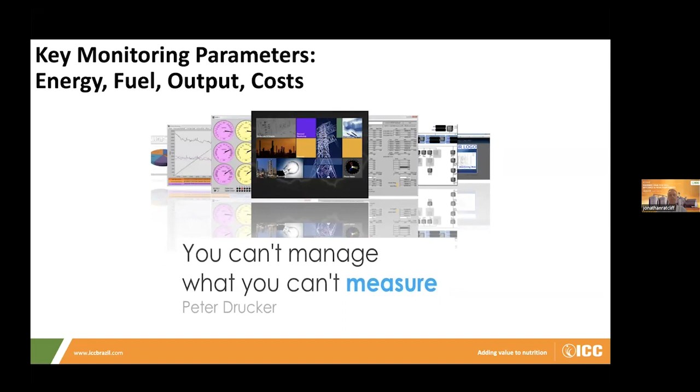Now, capturing data in this day and age is not difficult. That is the good part of this solution in terms of both cost and availability. There are many software programs that just require connections of power meters or other smart meters, a simple converter, and you can start to capture data. And with the right type of software as well, you can then manage how that data is presented to visualize the key parameters that you're concerned about. We're going to show you some examples of that later.

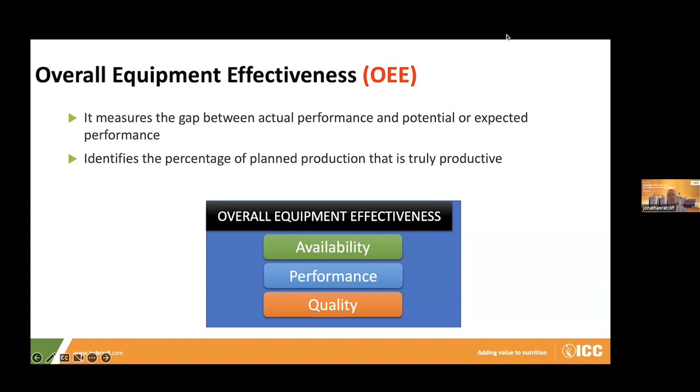I'm going to talk a lot about overall equipment effectiveness, or OEE. This is a standard that's come in from other industries, which often happens in the feed industry - we pick up other industry standards and incorporate them. Overall equipment effectiveness is used very much in automobile production, where they look to measure the gap between actual performance and potential or expected performance, and identify the percentage of planned production that is truly productive. In my experience, most feed plants do not operate at their operational capacity for a number of varied reasons.

We're going to look at some of those reasons during this presentation. Why is that? One reason can be that when equipment is set up, we can talk about any particular key machinery process or line in your feed plant - maybe the performance was running according to expectation, but over time that performance starts to decline, so when we go and look at the current situation, we may find there's quite a deviation between the expected performance level and the actual performance level.

Another scenario, not unusual either, is that when either from a new build and commissioning perspective, or just a new piece of equipment - maybe a pellet machine or a grinding machine, hammer mill, for example - the setup right from the start was never according to the expected output of that machinery. So it's been accepted that you're running at, let's say, 10 ton per hour instead of the rated capacity of that machine of 12 tons per hour, for example, and nobody has really challenged that. It's become an accepted norm rather than trying to understand why that machinery or process line was designed to produce 12 tons per hour.

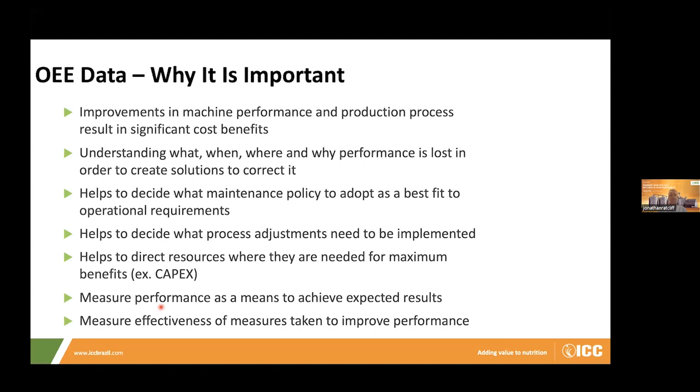So OEE really focuses on three aspects of production, and we can talk about an individual machine like a pellet mill at this stage because it's quite easy to visualize. The parameters are: is the machine running? How fast is that machine running? And how many products meet quality specifications? Those are the three parameters that OEE measures, and that provides this overall equipment effectiveness.

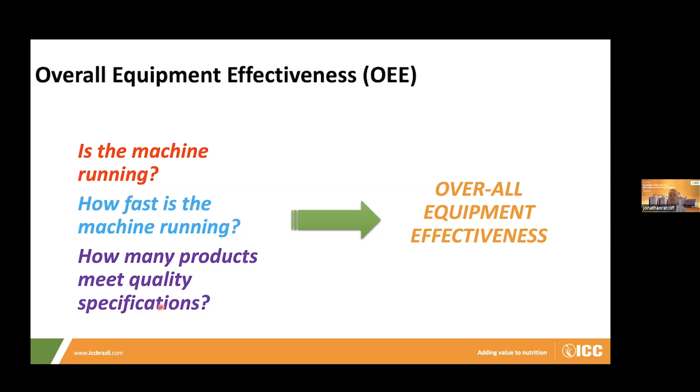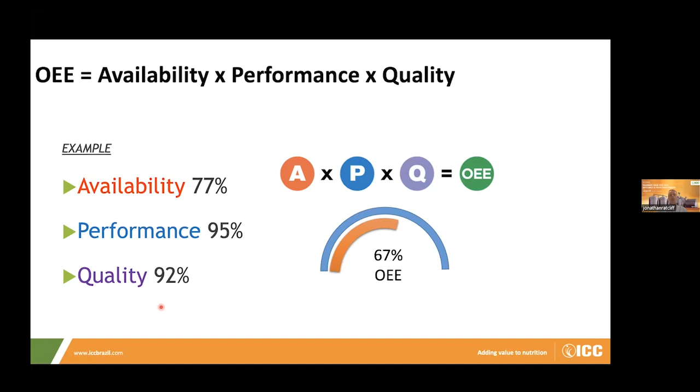What is considered good, acceptable performance obviously depends on site to site, because it will vary according to the age of the plant, the type of equipment you've got, and the overall setup and design of the plant. But generally, I would say you should be looking between 60 to 70% as an acceptable, typical area. High performance levels will be above 70%. Areas that need improvement would be anywhere up to 55 to 60%. That's just a guide, but really the number right at the start is not important - what's important is to understand where you are and then where you think you can get to through analysis of this OEE data.

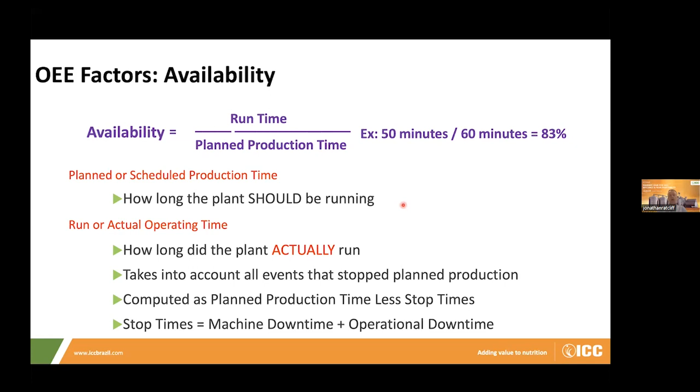One key point is understanding how long the plant should be running, and actual operating time will depend on how long the plant actually ran. It takes account of all events that may have stopped planned production - for example, breakdowns, die changes, cleaning out of the line, or waiting because of a run out of raw material. This is computed as planned production time less those stop times, which can be machine times or operational down times. So you have a planned time, and the machine running will calculate your actual operating time.

If we think about machine downtime, these are periods when the plant or equipment is not available or fails to perform its primary function as a result of mechanical, electrical, or other machine-related failures. This may be a result of planned or scheduled downtime or maintenance, in which case it's already planned and expected, or it could be unplanned, as a result of a machinery breakdown or a bottleneck in the process.

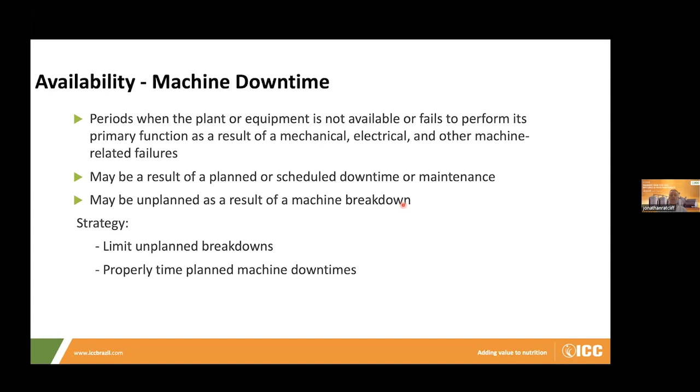From a strategic perspective, we want to limit unplanned breakdowns to a minimum and properly time planned machine downtimes so they don't reduce the total amount of available production time. How do we do that?

One of the key areas is an effective maintenance program. A good maintenance program should combine the right mix of three maintenance policies: corrective, preventative, and predictive. The more corrective maintenance you're doing, the less availability percent you will have in your OEE, because corrective by definition means you are reacting to a situation - that machine is already broken, there's already downtime involved, and that counts against your availability.

A good maintenance program results in less unplanned breakdowns. It's safer to do maintenance work and operate the machine because you're working when the plant is generally not operating. There's less total maintenance and repair costs, and the cost of labor involved. There should be no extra cost for emergency delivery of spare parts, because if it's correctly planned, they should already be in stock. It results in improved product quality, less reprocessing and wastage, less tipping of product onto the floor or back into reprocess, and the economic life of the equipment is also prolonged.

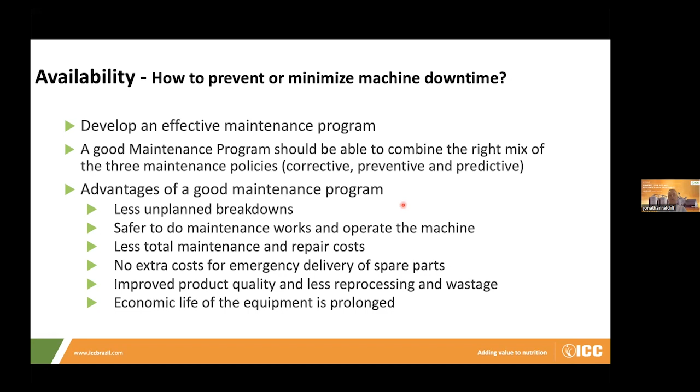Periods of plant unavailability caused by factors other than machine downtime could be product changeover - changing hammer mill, sifter screens, dies, etc. Product clean out, particularly if you're producing feeds with coccidiostats or antibiotics, or involved in aquafeed production; it could be because of the size of the pellets needing to be cleaned out from pelleting or extrusion and drying lines. Could be delays due to raw materials or packaging, premix availability, or a lack of finished goods warehouse space - so you physically are not able to produce to stock because you don't have the necessary space in the warehouse.

Certainly in some parts of the world, power outages are quite common, so that's clearly going to affect production. Lack of manpower could be an issue, particularly if you're relying on contract labor for packing operations and they simply don't turn up, or you don't have the manpower scheduled to arrive for that particular shift. Shift turnover - do all the operators on the night shift turn up according to plan?

It could be other issues such as boiler steam pressure buildup, fumigation, pest control issues that require downtime, or in cold climates, for example, your liquid oils - maybe palm oils and some of the harder animal fats - become solidified, and then you're unable to spray product because of severely cold weather factors. So many different issues can lead to operational or process downtime.

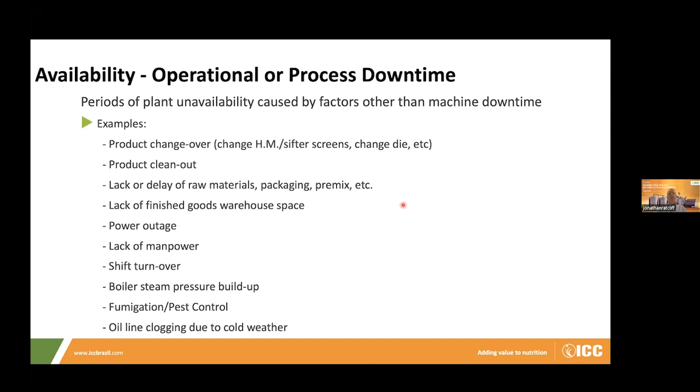The point about OEE is that it allows you to go in and analyze and understand what may be the common causes, and therefore what you can do to limit those from continuing to affect your availability.

Now, in most process plants, one of the areas you would look at to understand availability optimization is batching capacity, batching cycles. As you know, in pre-grind and post-grind plants, there is a cycle usually from blending or dosing and grinding through to the mixing and then through to pelleting.

So the batching capacity in terms of metric tons per hour is calculated by the equation you can see here, which is the batch size times 60 minutes for 1 hour, and then the actual cycle time.

Normally the cycle time, because of changeover, is longer than the 60 minutes. And this leads to a more conservative and more realistic calculation for the plant capacity, so it doesn't run at the full batch size. For example, three metric tons times 60 minutes would give you 180, but that very rarely is the case. There are other factors which slightly reduce that.

When equipment suppliers specify plant capacity, they are referring to a continuous cycle time without product changeovers or cleanouts or other bottlenecks in the line. This is not to be misunderstood as the guaranteed plant capacity, regardless of the number of feed types and the volume of each production run.

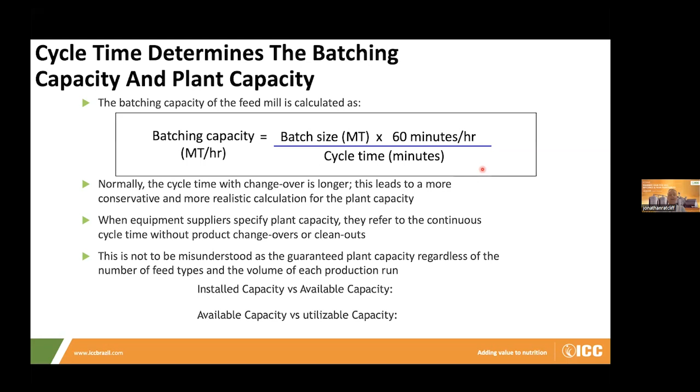Now, for pre-grind feed mills, quite often, if not planned correctly, there can be a delay, a waiting time between the weighing and the grinding and the end of the mixing cycle.

So there is a delay before the drag chain conveyor and the bucket elevators, for example, can start up again because they're waiting for the discharge process from the mixer before they can start the dosing process again.

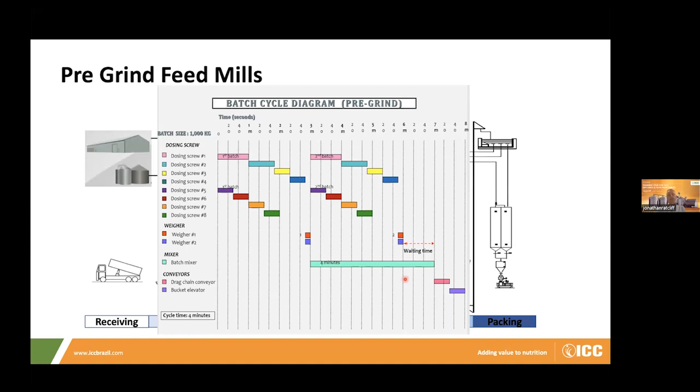Not all feed mills, obviously. If you're designed at an optimal rate, you won't have that kind of delay, but there will be circumstances, and I've certainly seen them, where there are delays as a result of that kind of inefficiency or lack of being able to provide the ground material to the dosing bins and through to the mixing in adequate time.

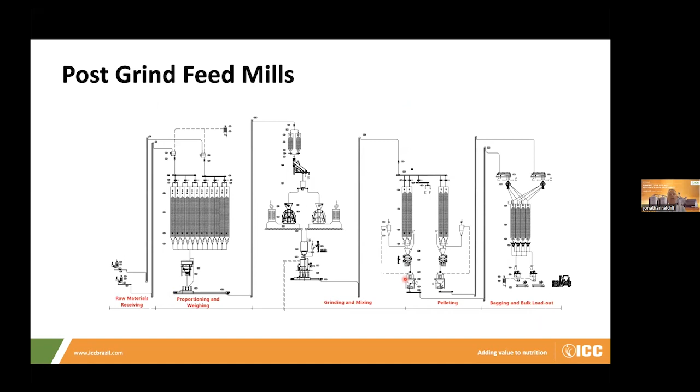In post-grind mills, of course, it's a different situation. Here we're grinding after the dosing into the mixing. So the delay is quite often a result of the delay between batching and the two sets of batching before they go to the grinding operation and then through to mixing.

And again, that can be through to the capacity of the conveyors that are transferring raw material to the dosing bins, and from the dosing bins to the scales, and scales through to the mixer. So a good study is to analyze your batch cycle and see whether you have any inefficiencies in the line that are creating a bottleneck. And if you do have a bottleneck, what can you do to resolve that issue?

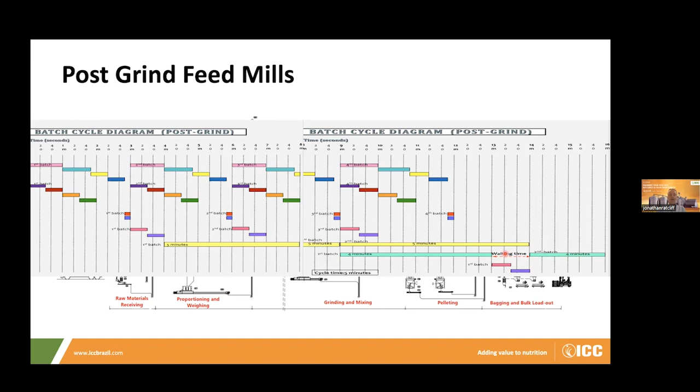So here's just some examples in terms of pre-grind mills. If the mixing cycle or pelleting capacity is the bottleneck, then some things you can do maybe is to shorten the mixing cycle time.

This could be done through increasing the mixer shaft RPM, for example. But of course, you've got to be very careful that that doesn't have a negative impact on your CV, for example. It'll also maybe create more wear and tear.

So you could also consider changing from a ribbon to a paddle mixer, for example, to reduce your mixing time. Increasing the batch size, but of course there is a limit to increasing the mixer load, and you may also need to increase weigher capacity or increase the number of weighers if you're thinking of doing that.

Ideally, the grinding capacity should be about 2 times the mixing capacity, and of course then you need the conveying capacity after the mixer in order not to cause a bottleneck through to the pelleting or mash finished product bins. So you may need to increase speed of conveyors, and you may need to increase the size of the conveyors if there is a bottleneck.

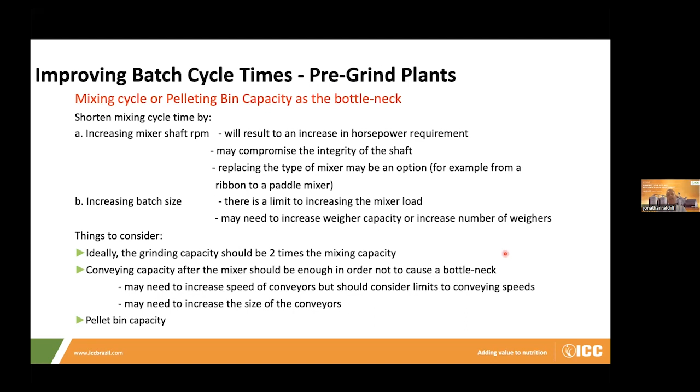And of course, if the bottleneck is in the pelleting area, if it's not because of the pellet mills themselves, it could be because of the pellet bin capacity. Modern designs would have usually a minimum of two pelleting bins with more than adequate capacity to keep that pellet mill running all of the time. But in some plants, that is not the case, and they're physically waiting for that product to become available.

Post-grind systems, then, if you're looking to shorten the post-grinding cycle time, we can increase hammer mill size capacity, or install additional grinders, rationalize the particle size to increase throughput by not unnecessarily grinding too fine.

Quite often I see in some plants that they grind to 250 micron. That reduces throughput. It's also maybe not optimal from a nutritional perspective, but it may be done for customer pellet quality reasons, but actually that's severely limiting your output.

So looking at how you can increase that, and therefore increase the output of your hammer mills, would be an advantage. And of course, applying variable speed drives allows for determining the correct screen and tip speed combination to achieve correct particle size. So you don't need to keep changing screens. You can determine particle size through adjusting the speed of the drive.

And after the post grinding, rationalizing sifter mesh size, so you divert more feed materials directly to the mixer and reduce amount of coarse material going back into the hammer mill, will also result in an increase in throughput.

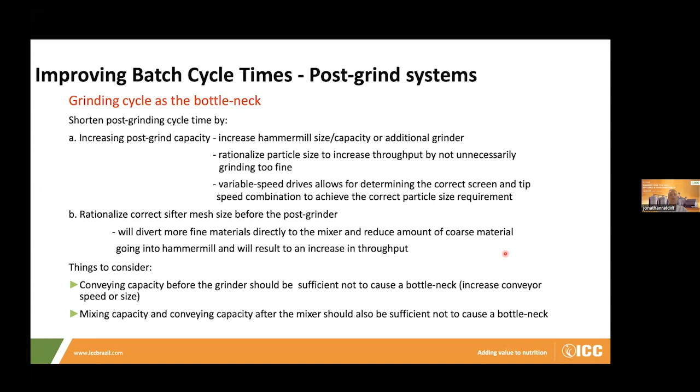Other things to consider: conveying capacity before the grinder, I already talked about, and the mixing capacity and conveying capacity after the mixer should be sufficient not to cause a bottleneck. So in a post-grind system, any fine material, raw material, shouldn't need to go through the grinding. You can bypass that, go direct into the mixer, save energy, and also increase the speed of the grinding time.

So how do we prevent or minimize operational or process downtime? Basically, start with a good plant design and process setup aligned with product specifications and volume requirements.

Obviously for new builds, this is fundamental work that you need to do in order to make sure that you're optimizing batch size, the number of lines, the number of product types or SKUs, the volume of each of those product types, consideration for special requirements.

So for example, heat treatment, retention time on conditioners for heat treated feed, for example, number of raw materials and ingredients. How many raw materials and ingredients are you going to use?

One of the most common issues I see is that feed mills are designed with too few dosing bin capacity and also weigh scale capacity. And that means you're limited in maybe the type of raw materials you can use, number of type of raw materials, but also you may be forced to be including low weights of raw materials in bulk into a dosing scale that is not designed for such a small weight of ingredient. So normally 1.5% of the scale size should be the minimum that will be going into that scale.

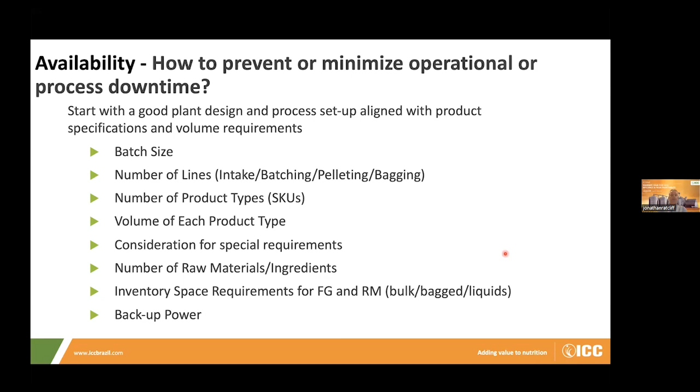Inventory space requirements for finished goods and raw materials, so adequate warehouse storage for both bulk, bag, and liquids. And of course, if power out is an issue, then backup power to minimize the downtime when you do have power outs.

And effective production planning and scheduling is really paramount. One of the hardest aspects of running a production plant, feed mill, is determining exactly how much to produce, when to produce it, and what materials need to be ordered and when.

You can't do that unless you've got a very good sales forecast that is accurate and updated, possibly every 3 months, to reflect the current commercial situation. Otherwise, it's very difficult for a feed plant to begin to plan and schedule.

And you need to decide on an inventory policy for commercial sales requirements, for internal volume requirements, and of course, custom mix requirements if you're producing like OEM products for larger customers.

But again, one of the largest inefficiencies in feed plants is small production runs. And many times I would challenge those plants that are producing small production runs. How much are you actually generating from a profit perspective on that SKU, and how much does that SKU cost you to produce?

So if you're producing a small amount, a 1 ton lot of a 2.5 millimeter pellet, the cost of that is significantly higher than a 10-ton run of a 3mm product. So have you accurately reflected that in the sales price, and is it going to still make you money?

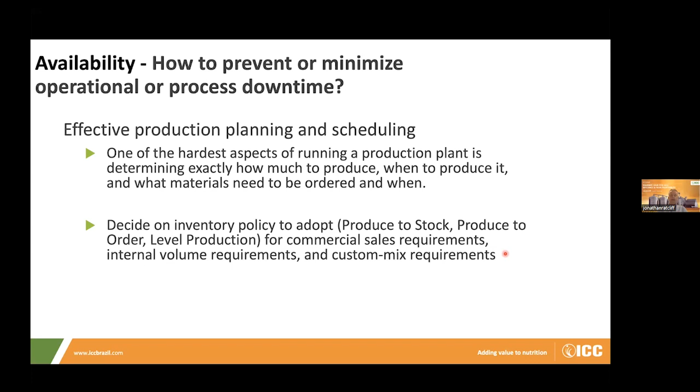If not, you should put a line through those inefficient SKUs and try to work to a minimum order size. Of course, the other aspect in that is lead order time. And the more lead order time that you have, the better you can manage that planning and schedule as well.

So good organizational planning coupled with the right personnel training. The organization plan should have flexibility for relief systems - training operators who may be looking after the pellet mill to do maintenance and vice versa. The people who do hand adds, for example, can also do some routine greasing maintenance and maintenance checks. Identify functions which can be multitasked, but provide the proper training for that.

Incentivize labor-intensive sections. Where you know you've got high labor requirements, particularly in packing operations, if you incentivize them, then at least they should be trying to optimize the output to the maximum rather than just working at a fairly pedestrian pace.

And then you have the question: how much of the process in the plant should you be looking to automate? Automation of feed plants is now a standard feature in most parts of the world, but the degree of automation does vary significantly country to country, region to region. So in many areas, there is still large scope to be found in terms of capacity optimization through automation, trying to reduce the labor-intensive sections of the plant.

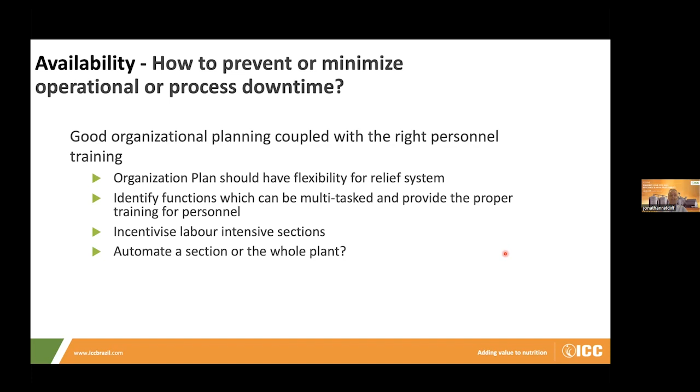So we talked about availability - when and how long the machines or the line are available for production. The other calculation you need to know is the performance within that available time. You can see here two examples: total production or runtime divided by the rated run rate, the capacity rated runtime for that machine, or actual production versus actual rated tons.

So if you produce 14 metric tons per hour and the rated capacity of that machine is 18 tons, that's a 78% efficiency. This calculation within OEE takes account of anything that causes the manufacturing process to run at less than the maximum possible speed when it's running - not downtime, we're just simply talking about the output against the rated capacity.

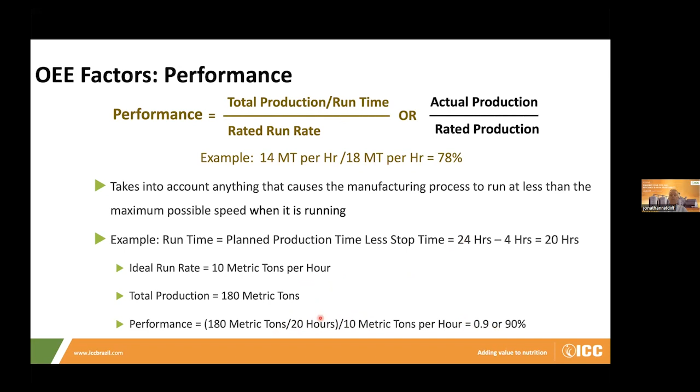How to improve pellet mill throughput? Focus on pellet mill, because that's one of the areas where we would see product performance capacity underperforming. That can be for many, many reasons - I've just given a number of examples here.

Correct steam conditioning is fundamental - conditioning fill percent and retention time. It still surprises me how many plants don't actually measure or even open up a conditioner and look at the percent of fill inside. If you're not at 45 to 50%, it's not going to be operating at its operational capacity and efficiency.

Choosing the appropriate L/D ratios for improved PDIs in your dies, to conform to lower fine restrictions and minimum fine returns to the pellet bin.

Appropriate size selection of sifter screen, so after pelleting, again to conform to the appropriate product size requirements without sacrificing fines restrictions - we're going back to the pellet bin. All of the returns, whether going back to the crumbler or the pellet bin, are reducing your capacity optimization. Correct die selection to increase throughput without sacrificing feed efficiency.

So what is your target for PDI, and how critical is that to the type of die that you're using? Is there scope to actually have a slightly less restrictive die so you can increase output, but not sacrifice your physical quality?

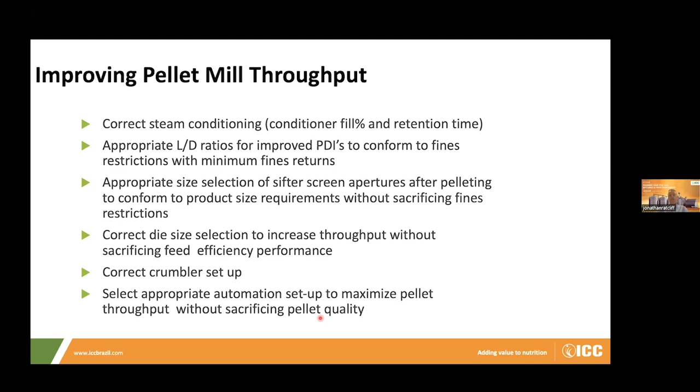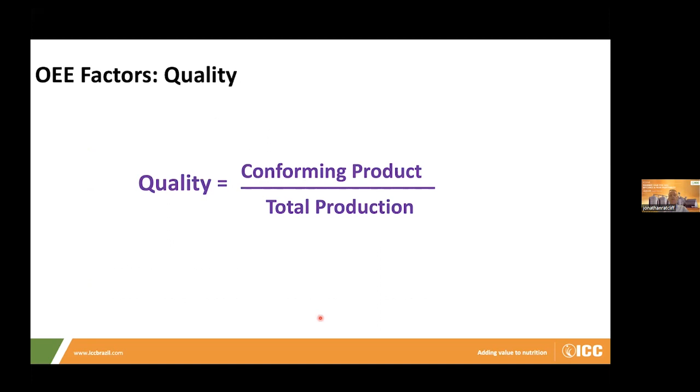The final parameter we mentioned was quality - conforming product divided by the total production that you use. Here, of course, it's a bit more of a challenge because those two other factors we can measure very easily in real time, but for quality, that's not as easy to measure in real time.

So in many cases, the number is maybe set as a standard, maybe at 100%, for example, and then adjusted at the end of the batch run for that particular SKU based on how much product has been rejected from the line from that particular run. The conforming product is the quantity of feed that has passed quality standards, taking into account manufactured parts that do not meet those standards, including any that have been taken out for rework. As I said, typically this number is entered manually at the end of the run.

There are, however, ideas in place already where they are trying to, through sensor development, measure in real time how much is being diverted, how much is not available because it's going to be put back for reprocessing, and therefore calculating that automatically into the OEE.

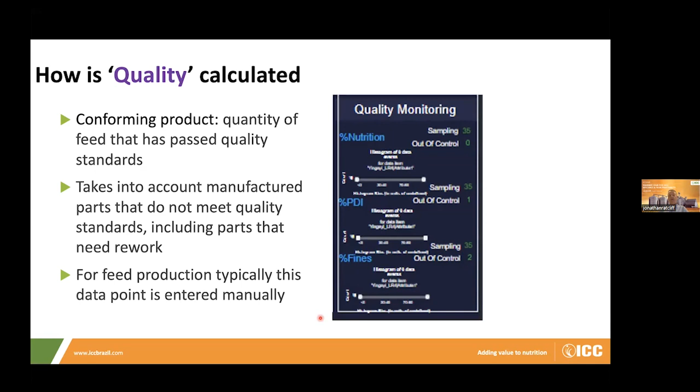So having talked about the parameters of OEE and how we measure them, I said at the beginning the architecture is quite simple. With technology today, we can set up measurements on all of the key machinery using a variety of sensors. Digital power meter is fundamental, but then other sensors such as steam flow meters, gas flow meters, temperature meters, etc.

That data can be gathered and processed and then stored in a cloud and then sent to whatever display you require, whether on an iPad or on your phone, whatever format you want. You can have that information and data available in real time.

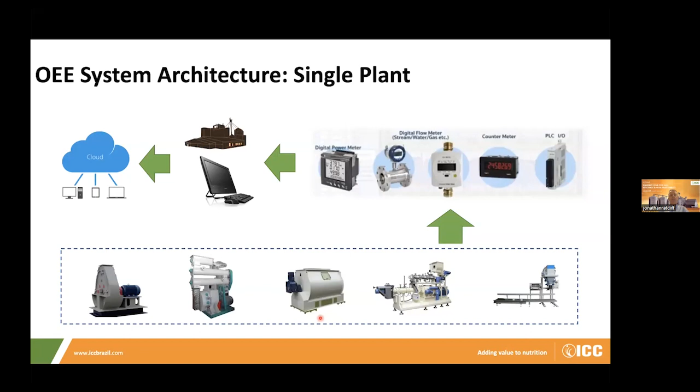And those displays, as I said, make it much easier for management and operators to understand how efficiently the plant is operating. They can visualize it and see the numbers, and they can also see how they are producing against the targets that have been set either through KPIs or just as the targets within their OEE system.

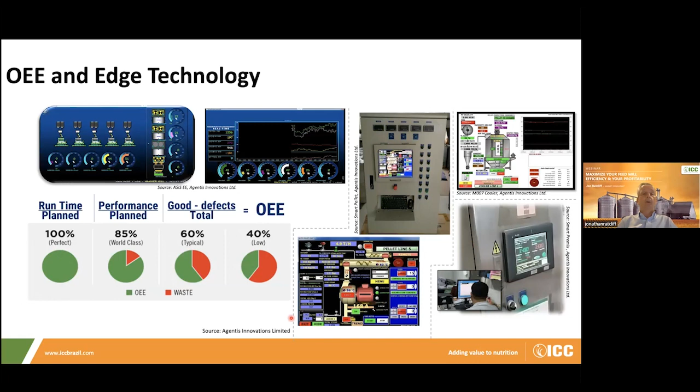And the beauty is also we can measure within the plant, and we can also measure between plants. Now, of course, some of the measurements are not going to be directly transferable because of different plants, different designs, different machinery outputs. But the principles and the energy efficiencies, for example, it's useful and very helpful to be able to do this, certainly from an investment perspective and also from a management perspective. If we know one plant's energy costs are running higher, what is the reason for that?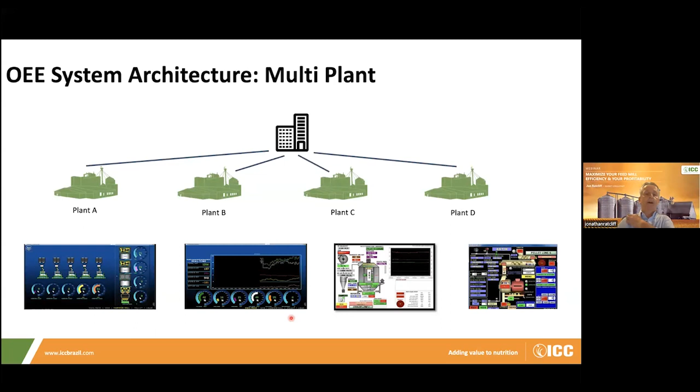Do we have the data? And if we analyze the data, what are the causes of that? And what can we do to reduce that cost? As I said, from the cloud we can produce web reports. These are customized to individual customers, so you can set them up in whatever format you like, whatever the company or really the parameters that they want to look at in terms of OEE.

Simple example here for the availability, the quality, and the performance, for example. Here's another example just from 3 pellet mills, same process line, 3 different lines, same feed mill, and you can see the difference in performance between those 3 pellet lines. You clearly want to know why is one running at 30%, another at 47, another 52.

Most probably it's something to do with the SKU, the formulation. And this is the other important aspect of having measurements of OEE based on each formulation. If you know that a particular formulation is going to reduce your OEE, your operational efficiency, by 10 or 20%, then you should be dialoguing with the formulator and nutritionist to say, hey, this formulation is not cost effective. It's slowing down my production. What can you do to improve that?

And that's really important in this time in our history because of raw material costs. Formulators and nutritionists are tempted to use cheaper products, maybe harder to grind, harder to pellet products - cassava, sorghum, for example, tapioca - these type of products are going to have a direct impact on your production efficiency.

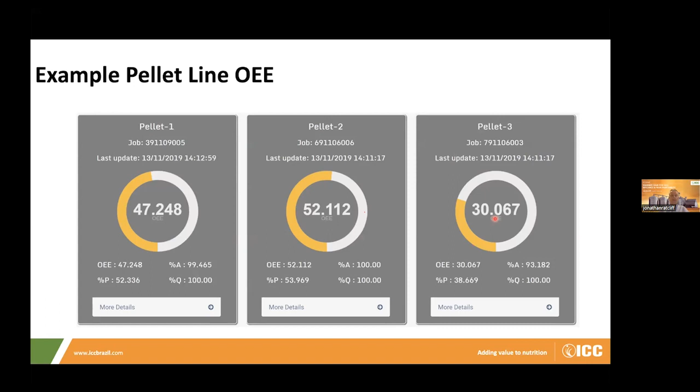So for the saving, if it's done on a least cost basis, how much is that actually costing on a per ton basis for that SKU against what it's costing you to produce? Unless you have that information, back to that adage, if you don't monitor it, you can't manage it. You can't present that information to formulation and say, this is the result of that formulation, and we need to make changes.

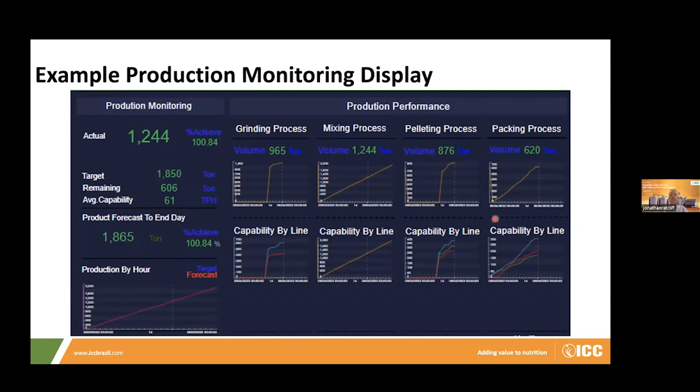To improve the efficiency and output from that particular SKU, we can set up displays which identify the full production process, from grinding through to packing, the targets, the efficiencies, the capability, all of those formats. There's an infinite number of ways you can display it, but it gives you a very instant real-time indication of what's happening in the feed plant. And that's what you need in order to make the changes which drive efficiencies in the shortest time possible.

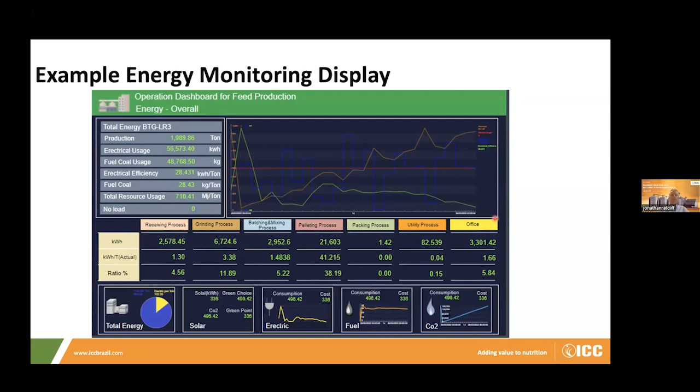Same for energy. Energy cost is really a demanding factor right now. Peak demand factor also is going to impact your cost. So how you manage your energy, how your energy is billed in terms of times of day, and how you plan production according to your energy costs, ultimately to make sure you've only got machines running that necessarily need to be running, and ensure all other items are switched off and not running idle, burning up valuable electricity or other energies, to optimize your overall energy efficiency. This is really a must-have requirement if you're going to stand any chance of managing and optimizing your energy costs through these very challenging times.

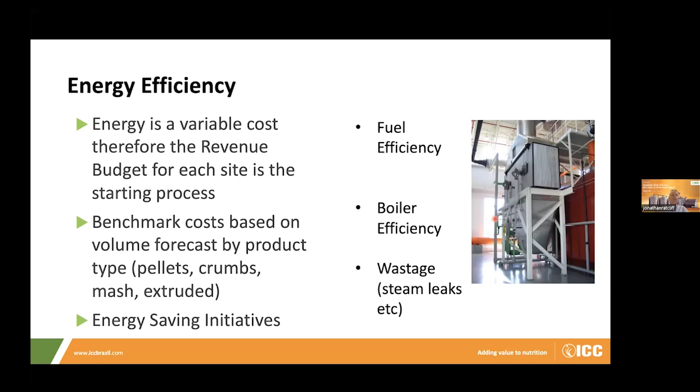So in terms of energy efficiency, it's a variable cost, therefore revenue budget for each site is the starting process. You need to be able to plan what is the correct energy cost per kilowatt hour per ton based on the forecast and the budget in place for that individual plant. Bench those costs against volume forecast for the different types of products, pellets, crumbles, mash, extruded products, for example, and then think of energy saving initiatives, which could be around fuel efficiency, boiler efficiency, wastage, steam leaks, etc. Many areas where you could be losing energy efficiency within the mill.

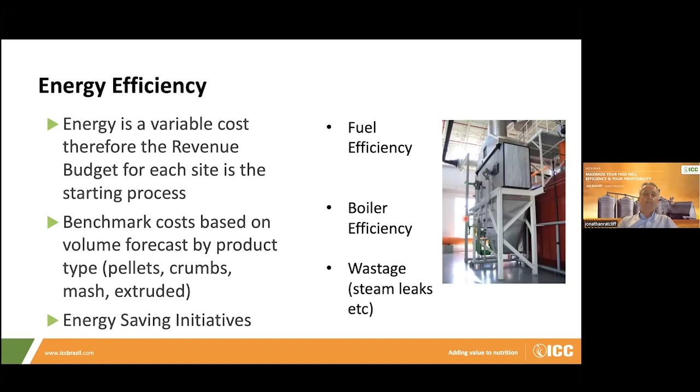Same for efficiency of losses for raw material. We often talk about shrink. For raw materials, losses on arrival, in storage, both physical lossage and moisture lossage in storage, accuracy of inventory measurement procedures. It still remains a substandard technology in many feed plants, where people go around counting, dipping bins, trying to estimate stock levels, getting misleading information that gives us the impression that we're not losing stock when actually we are, or vice versa. So reviewing stock taking procedures and technologies for stock taking is a recommendation.

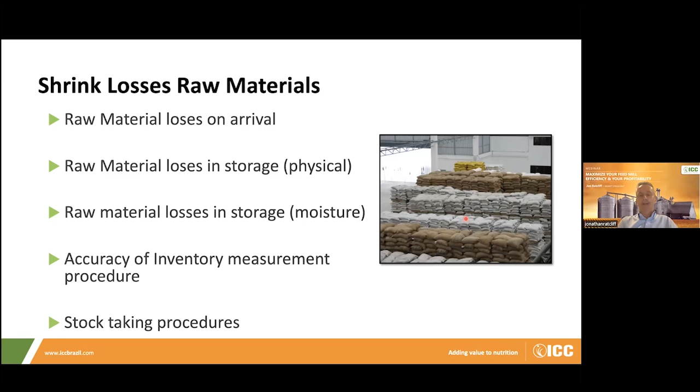And of course, shrink losses in the process are around moisture management. Again, the cost of losing moisture has never been higher as a result of the high cost of raw materials and therefore the higher cost of finished feed. Every percent, or 0.1% of moisture that you can retain in your feed, is going to be very valuable. So how you do that depends on where those losses are occurring in the line and what you can do at those various interjections to reduce the moisture loss. It really is a critical part of the process and one you should not be ignoring.

Cooler and drying efficiency - overcooling, over drying are going to be costing you a lot of money. Those pellet and crumble sieve returns I talked about that are being reprocessed - it's not just the cost of the fact that they're going to be reprocessed two or three times, it's actually the denaturation of some of those heat labile raw materials, particularly vitamins and feed additives, that are going through a heat treatment process one, two, three times maybe.

It could be around weight tolerances on your scales, your batching scales, weight tolerances on your bulk loading or your packing scales. And if you're packing into bags, what is the tolerance on the weight of the bag and how much are you giving away? Even if it's only a gram or a few grams per bag, if you multiply that across all of the bags produced in a month and then a year, it could be potentially a very significant amount of money.

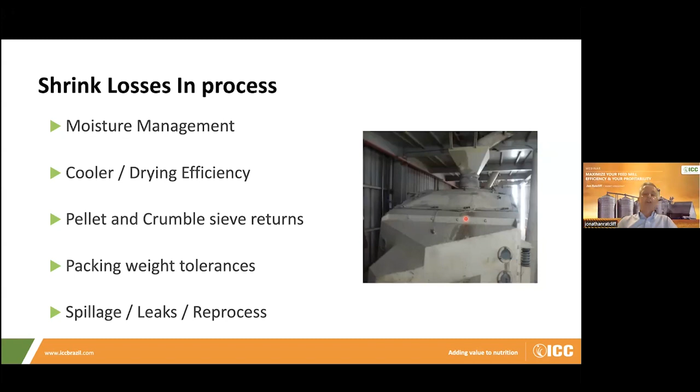And then of course, spillages, leaks, reprocess - this is where maintenance plays a key part. So don't be fooled into thinking maintenance is an easy cost saving. Reducing maintenance usually leads to additional costs in other areas of the business.

For personnel efficiency and people management, then labor costs, we need to look at shift patterns, the manning levels for those shifts, the operating hours, and of course requirements for overtime. And therefore having a good operational budget is the key starting point to have that planned efficiently.

The level of automation, process and key equipment is getting much more sophisticated. And we know many plants now, new build plants, can be running with 3 or 4 operators only, bulk only in most cases, or fully automated packing, robot stacking and warehouse loading systems.

It's been available for a number of years, but certainly in Asia, some of the plants have been slower to adapt to that technology. But now, due to costs, they're having to relook at that and really look at how they optimize their human resource within the plant to its most efficient level.

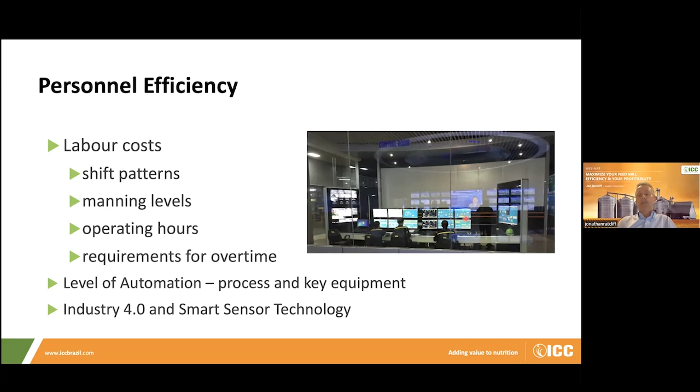And we talk about Industry 4.0 and smart sensor technology. There's a huge amount of technology now that is already in feed milling and will be coming into feed milling that is going to improve availability, improve performance, and improve quality management. So endorsing those is going to be a benefit to your business.

So for performance efficiency perspective and management, setting up of your hammer mills, your mixer efficiencies, your conditioning and steam quality, looking at pelleting - anyone running pelleting with a manual operator simply cannot produce the level of efficiency of output. I don't care how good the operator is, because whoever they are, they're going to change on the next shift, or they're going to be on holiday, or they're going to be off sick.

They're not continuous. And the software programs that automate pellet mills now and extrusion plants are far more efficient than a manual operator can do. And I would include semi-automatic systems as well - simple PID loops, they're not efficient, and they can't ramp up production as quickly and ensure output at the highest level compared to fully automatic processes.

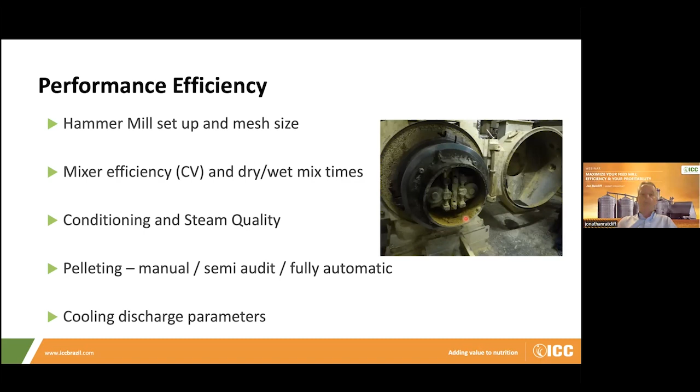And even when we look at cooling and drying, there are automated processes here that can consider other parameters than the standards. For example, in cooling, bed depth and temperature - there are other parameters: moisture of the pellets inside the plant, the airflow, the volume capacity of the cooler, for which programs are now developed that can help optimize discharge to prevent those losses of moisture that I talked about earlier.

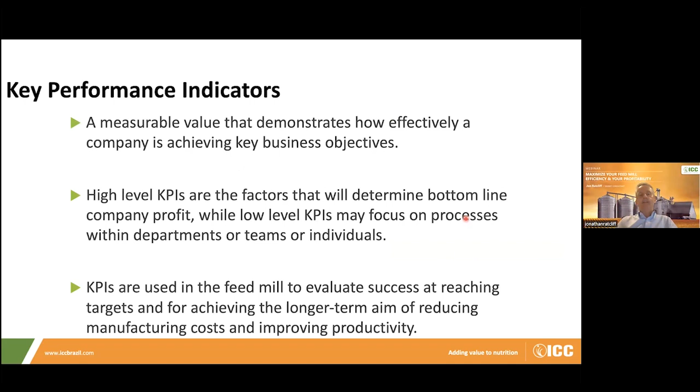So with all of these initiatives and with all this data that you're generating, it allows you to then look and be in a position to talk about key performance indicators - measurable values that are going to demonstrate how effectively the company is achieving their key business objectives.

High-level KPIs are the factors that will determine the bottom line company profit, while the lower level KPIs may focus on the process within the departments, teams or individuals. And those KPIs are used in the feed mill to evaluate success at reaching targets and for achieving the longer term aim of reducing manufacturing costs and improving productivity.

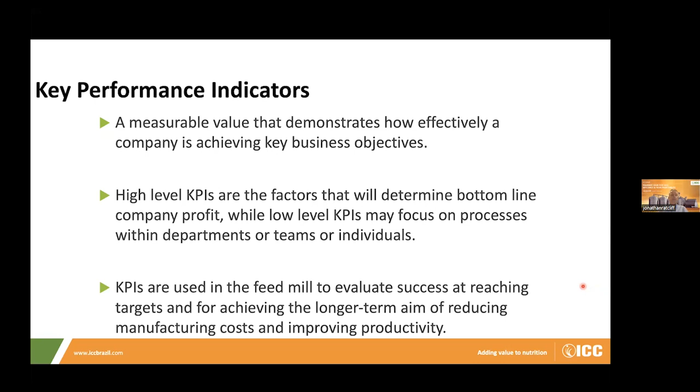So find out where you are, and then what is the achievable target to improve - set that as a key KPI, and then measure it against it. And if you don't achieve it, okay, what was the reason? If you have the data available, you'll be able to understand why you are not achieving that KPI and what you can do to change, and therefore allow you to meet that KPI target, either through simple changes within the process, or maybe it requires capital investment, CapEx, to improve some part of the plant in the process.

And here are just some of the example KPIs that you may expect to see, and I'm sure many of you are already operating within your plants: stock loss or gain or shrink, the percent of returns and reprocess, either percent of production or finished goods produced, your output in tons per hour per machine, your electrical consumption and kilowatt hours per ton produced per shift or per run or SKU, or perhaps the amount of steam, the volume of steam produced per ton, the labor cost, so tons per man hour, for example, and quality percentage we talked about already.

So what percent of the total feed that you produce is saleable goods? Maintenance performance, so how are you performing on downtime due to breakdown? Setting a KPI to limit that to as low a level as possible, and then measuring against that. And of course, safety, for example, days since last accident, or any other parameters however you want to measure safety within the plant.

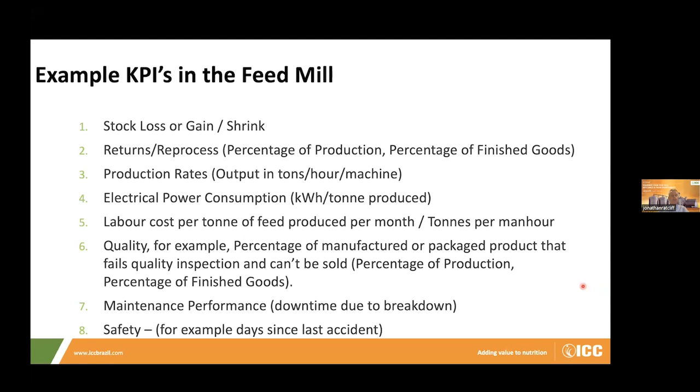Here's an example of a breakdown maintenance KPI by month. You can see that the target was set around 3%. So they're below the target, but the slightly concerning thing is that they are on an increasing trend. So you'd want to analyze, and the analysis is done down below, what may be the factors.

And therefore what needs to be done in order to bring that back into a corrective state. So visualizing KPIs is very important and easy for people to track where they are against each of those targets.

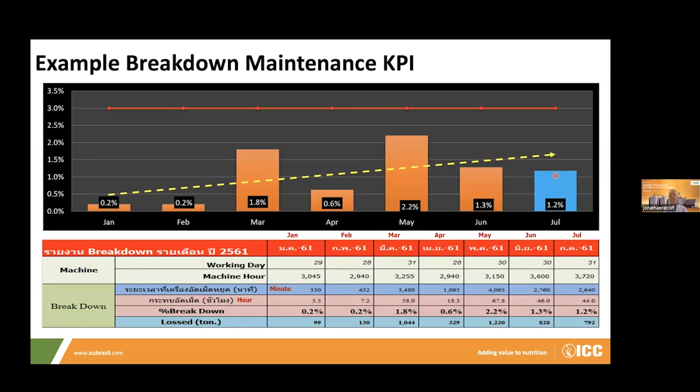So in conclusion and in summary, data, preferably real time, is required to understand performance efficiency. If it's not in real time, it's unlikely that you're going to make the right interjections, the right changes at the right time in order to correct efficiency, without it running for such a long period that you're then accounting for low efficiency at the month end, for example.

Real-time data is what you want to be achieving, having that displayed as required on whatever tablet or format you want of the key parameters that you want to measure. And then understanding the bottlenecks within each plant that are impacting your availability, your performance, and quality.

And then finally, setting those KPIs to evaluate success at reaching targets and achieving the longer-term aim of reducing manufacturing cost and improving productivity. Because I can be pretty assured that in almost all feed mills, there is scope to improve efficiency. It's just understanding from the data where and what you need to do, and then being able to measure that and understand the success or not of those changes that you've made.

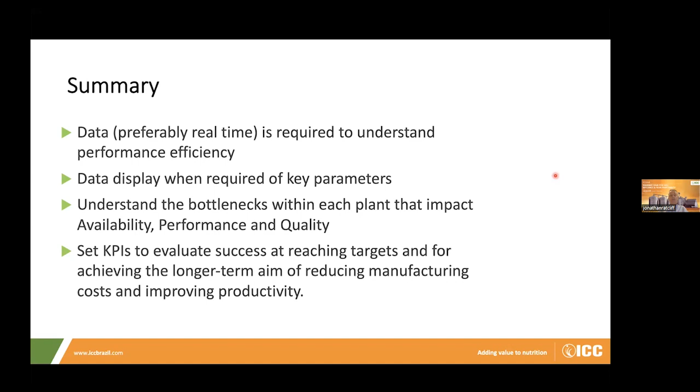So with that, I'd like to thank you for your attention, and I look forward to any questions that may have been submitted during the course of the seminar. Thank you.

John, thank you so much for this great presentation. I am so glad. I hope the audience enjoyed as much as I did. John, we have a few questions here from different regions. Are you ready? I'm ready. Yes, far away.

First question from the audience: which L/D ratio die is best for shrimp feed to increase the feed stability? Okay, well, shrimp feed is a very demanding pellet to produce, partly because of the raw material profile of the formulations, and partly because of the sizes that are required.

So normally we're talking about very small sizes, sometimes less than 1 millimeter, up to maybe 1.82 millimeter and beyond. So the L/D or compression ratio that would be required would be based upon a combination of the raw material, the formulation, but also the equipment that you're using for pelleting. And most plants—you may be extruding for shrimp, but most, I would imagine, are using conditioning and pelleting.